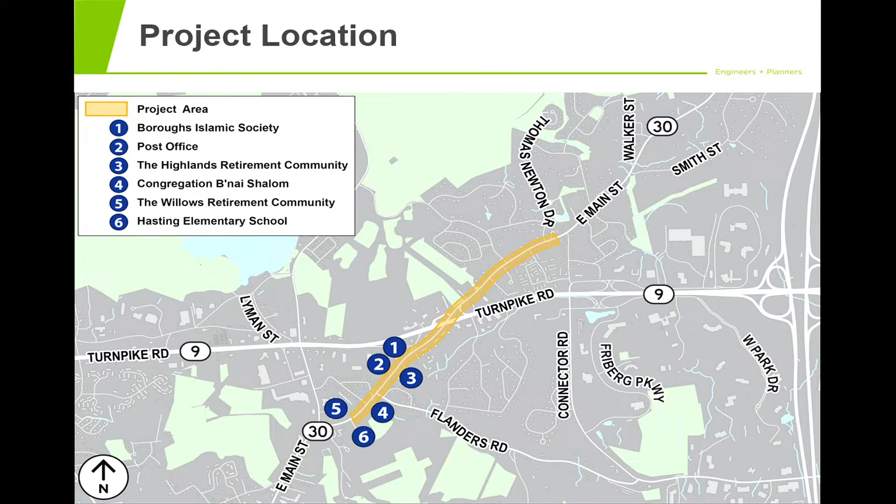So the next few slides have a lot of words. The point here is just that the effort to do this project is documented in guidance the town has produced. Maybe some of you were part of those documents.

The master plan highlights an intent to expand pedestrian and bike access for residents, along with addressing some traffic concerns. If you're familiar with East Main Street and Flanders Road, that intersection gets pretty challenging at times. There's been discussion for 20 years about how to address that, and this project is intended to hopefully address that issue.

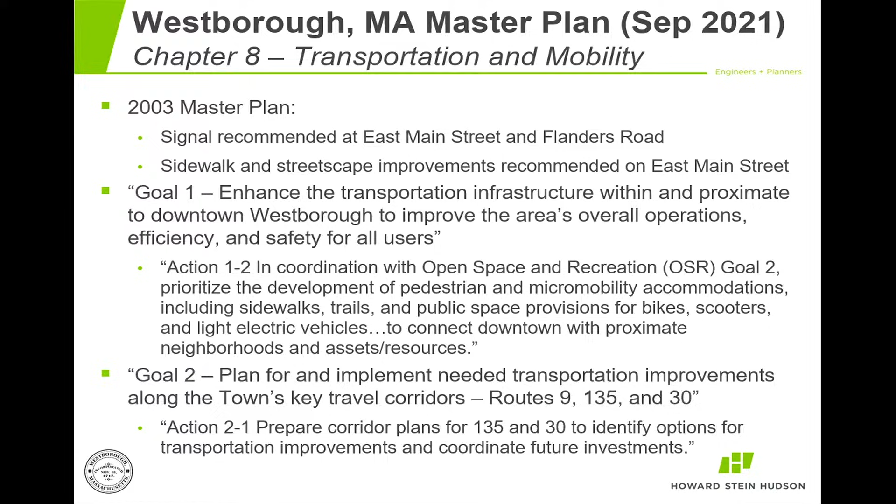We also have a complete streets policy, and we're part of the state's Complete Streets program, which offers funding for projects that improve mobility by bike or pedestrian. There are some components on that list that would be addressed as part of this project too.

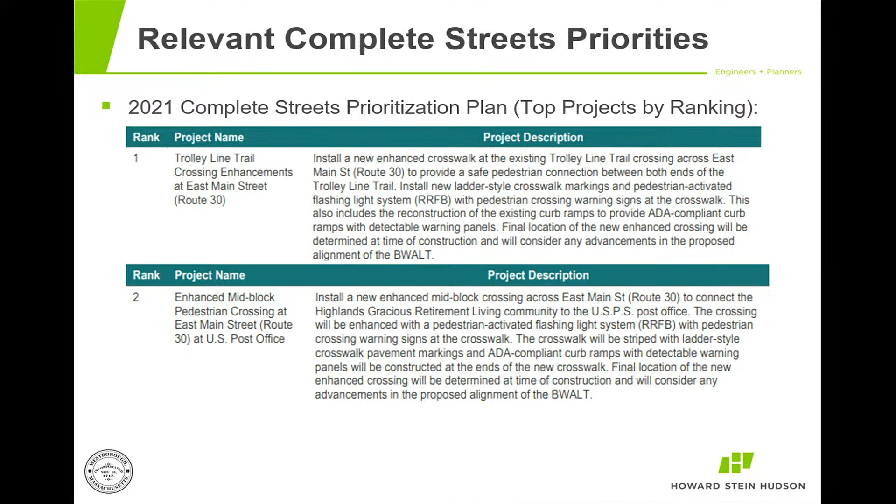So our goals - I've pretty much set them. We want to extend access to the community between the downtown and the outer limits by bike and pedestrian means of travel. The gist of this project is an 8-foot path that would extend from basically Hastings School, head towards the Flanders East Main Street intersection, resolve that with potentially a traffic signal, keep going, go under the Route 9 overpass, and all the way out to Thomas Newton Drive.

8 feet, I mentioned that because going back to the Mass DOT requirements, the requirement is actually 10 feet, and that's what their funding directs. We intend, and we've already discussed, going back to them to get a waiver based on certain circumstances to get that reduced to 8 feet. But we're already starting at 10, trying to get it to 8.

All of these things will come up, but I can see it in people's eyes, you just want to know what's going on - and so why don't we do other things?

Well, there's other options we have. You can put in a sidewalk - Mass DOT is not going to pay for that. So if we want a sidewalk as a town, that's an option we can pursue, but it's going to be a 5-foot wide sidewalk and the town's paying for it in some form or fashion. I mentioned this project's in the $8 to $9 million range, so a 5-foot sidewalk probably isn't 8 to 9 million, but it's going to be several million to get to the same location.

Other alternatives Mass DOT offers, if you don't do a 10-foot wide shared use path, are sidewalks on both sides of the street with bike lanes somewhere in between. It's kind of an alternative way to get away from the shared use path if that's not an option. In this case, looking at the corridor and the conditions that exist, it didn't seem to make sense to put two sidewalks, one on each side, plus bike lanes, because this shared use path, as many of you are probably anticipating, will have some sort of impact on that corridor. But two 5-foot sidewalks and bike lanes would, in our view, have more of an impact. So we discussed with Mass DOT the option of the 10-foot and the potential for the 8-foot path.

So that's what all those words say basically, in terms of our goals.

What I'm going to do now is hand it off to Howard Stein Hudson. They're going to walk through what's out there now. Many of you are familiar with that, but we're going to highlight what's there, and then we're going to talk about what we're proposing would go as part of this project.

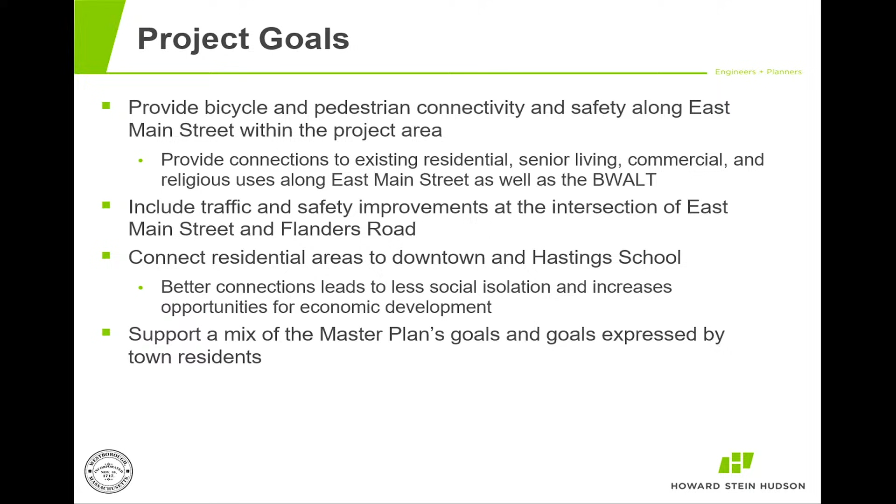Thank you, Chris. My name is also Chris - Chris Lyman. I'm the project manager and lead civil engineer from Howard Stein Hudson for this project. My contact information will be at the end of this presentation, but you guys will probably be seeing a lot of me over the next couple of years being the lead on this project. If you guys ever have any concerns or questions, my contact will be at the end of the slide, so don't be afraid to email me or contact me.

I'm just going to walk us through - Chris already hit on how this project was initiated with Mass DOT and how we got the funding for this project. Back in November 2022, we helped the town put together a rough estimate and cost. We presented that to the Mass DOT Project Review Committee. They liked the project, but they came back with some comments, mostly regarding the cost. The original project was closer to about $12.5 million.

It would have extended all the way to Walker Street, roughly an extra half mile longer than the current project. Mass DOT said they like the project, it's just the funding source. Each district only gets a certain amount of funding per project year, and $12.5 million would have been a good chunk of this district's money for that specific year. They try to spread funding across a couple of communities each year for each Mass DOT district, so they asked us to find a way to lower the cost a little. That's why the project now goes from Hastings Elementary School to Thomas Newton Drive.

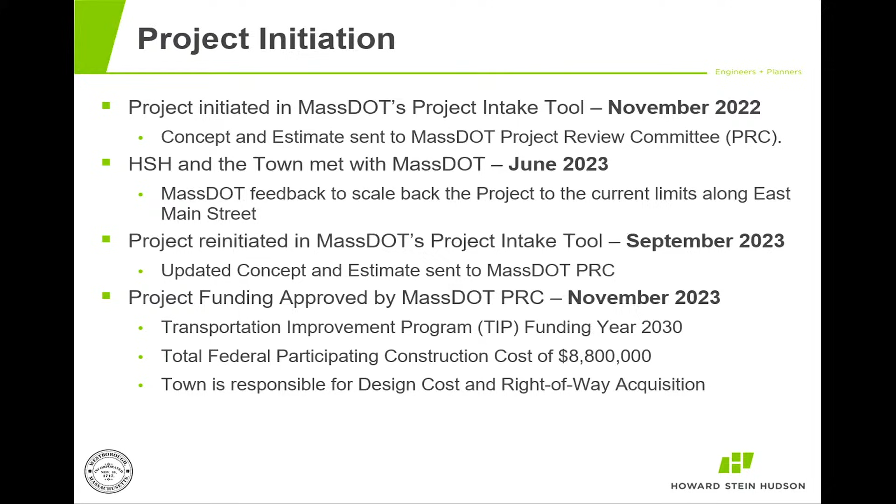After the project was initiated, we started the design process. In November 2023 we got our PRC funding, and in May 2024 we started collecting existing data, including traffic collection data which we reviewed. We then started putting together a scope for the project, which is something we hand over to Mass DOT.

This is our plan and our intentions for the project. Based on our traffic data, these are the potential safety countermeasures we're considering, things like high visibility crosswalks and curb bump outs. Basically we're telling Mass DOT these are the appropriate measures for this corridor.

We got through the scoping process and then moved to the intersection control evaluation. This is only for intersections, not the whole corridor, and specifically for the Flanders Road and East Main Street intersection. You go through a stage where you come up with multiple concepts, whether it's a stop sign controlled location, a signal, or a roundabout. We look at all those options.

We weigh them based on cost and effectiveness to safety, checking if they increase safety at a reasonable cost, since safety is the most important thing. We also look at potential environmental impacts and right-of-way impacts, making sure we're not taking people's land unnecessarily if it doesn't improve safety compared to a more conservative measure.

Going through that process, we determined a signal would be the best option at Flanders Road and East Main Street. That's because the size of the roundabout needed there to allow trucks to pass through would be quite large, with a big impact on nearby residents. This location also didn't have many severe crashes, so the increase of T-bone or head-on crashes wasn't a concern, making a signalized intersection the more appropriate control option.

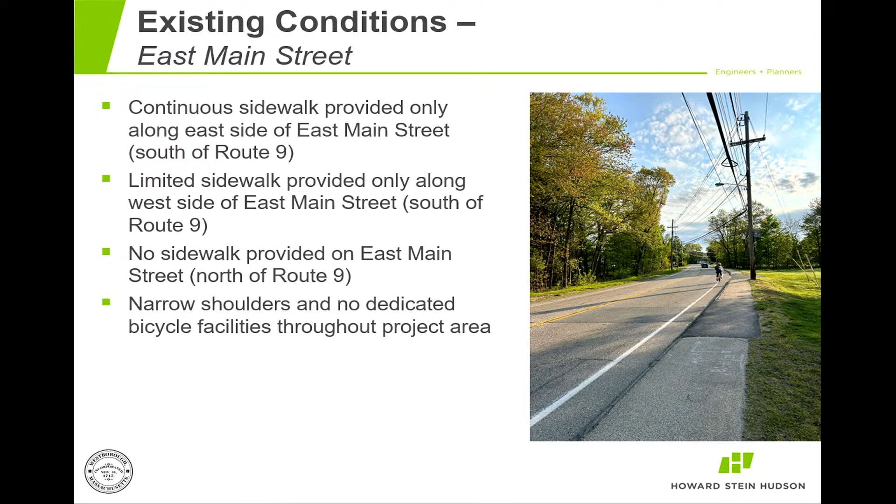Along the corridor for the existing sidewalks, there's a lack of American with Disabilities Act compliant pedestrian curb ramps and sidewalks, which you can see in the picture — there's no marked crossing and no detectable warning panels for when a pedestrian were to enter the roadway, which is required to be compliant with the ADA Act.

There's also a lack of crossings along East Main Street, including no crossing provided for the Boston-Worcester Air Line Trail, though there is an existing crossing approximately 125 feet to the north. The existing crossings generally lack safety measures such as painted crosswalks or curb extensions.

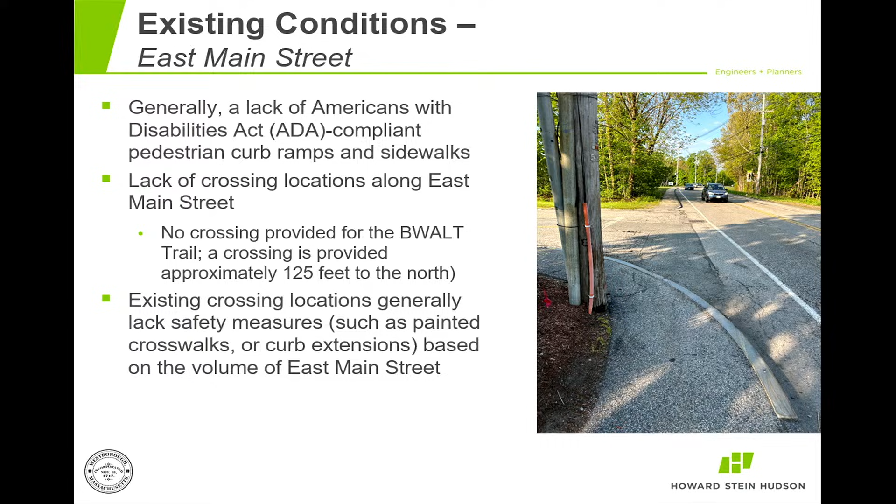Looking at the Flanders Road intersection with East Main Street, there's a lack of gaps for left-turning vehicles coming from both Flanders Road and East Main Street. The left photo shows the queue on East Main Street, and the right photo shows the queue from Flanders Road.

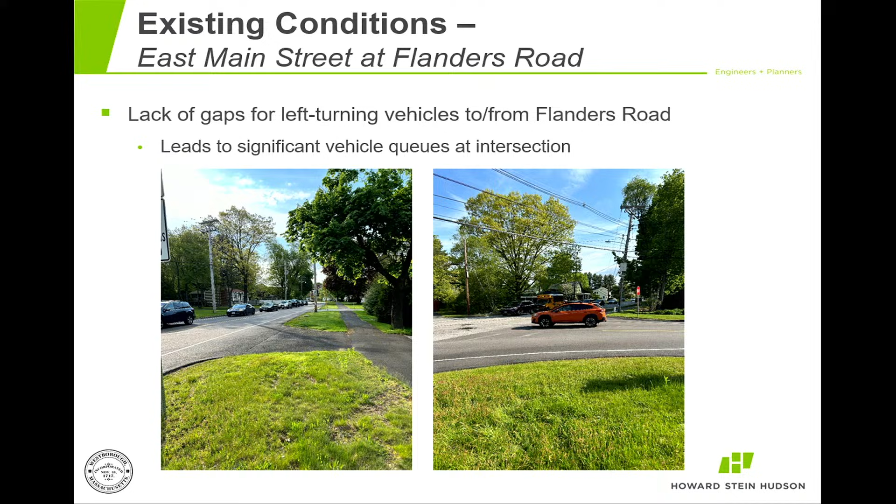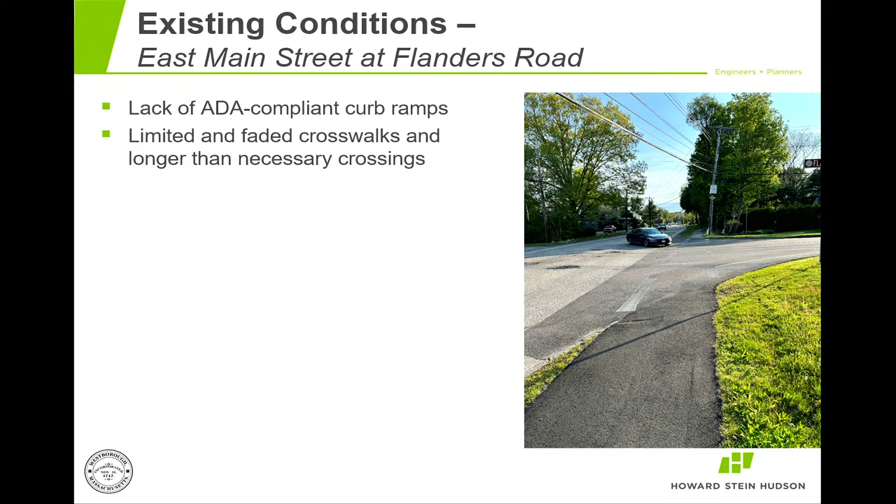As well, for the crossing itself for pedestrians at Flanders Road, the crosswalk is faded and there are no detectable warning panels for people crossing the street. It's generally an unsafe crossing for pedestrians trying to get across this already very busy intersection.

And I'm going to hand it over to Angela to talk about the proposed improvements.

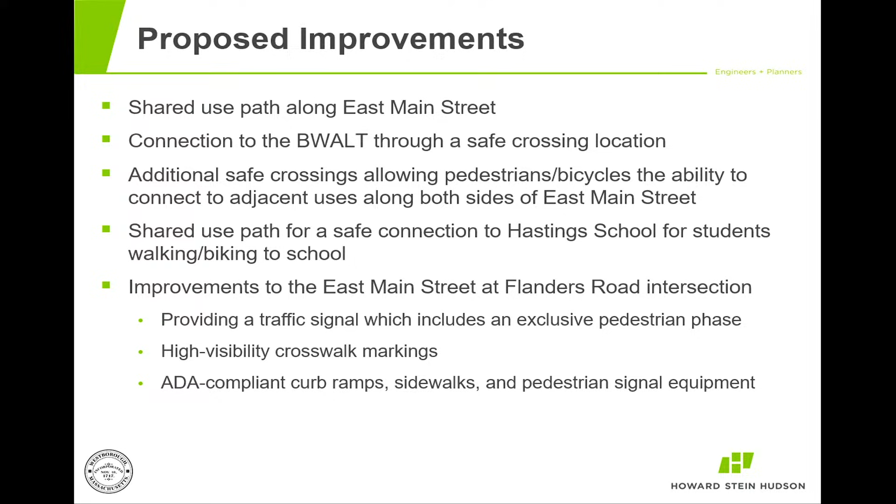So a little bit about the crossing locations we're going to be providing: there will be four. One will be at the trolley line trail, and another at the U.S. Postal Service's more northern driveway crossing, a bit to the north, maybe about 300 feet.

There will be one at the McDonald's driveway, providing a crossing for the trail to go from the east side of the road to the west side on East Main Street, and one at Windsor Ridge Drive, as that's a known desire line for pedestrians and bicyclists at this time.

And a little bit about how we evaluate these uncontrolled crossing locations: we look at the FHWA's STEP program, which allows us to evaluate safe crossing measures based on roadway geometry, volumes on East Main Street, and posted speed limits, providing us with possible countermeasures for these crossing locations to improve safety.

Some of the crossing measures we'd provide include high visibility crosswalk markings, adequate nighttime lighting for visibility, and crosswalk warning signs including advanced crossing warning signs. All of these locations also warrant an RRFB for added visibility of pedestrians.

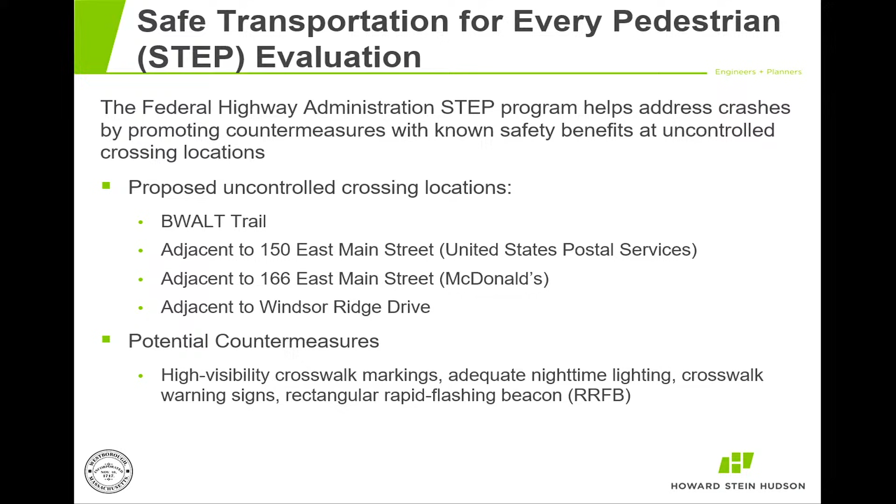Okay, so now the reason why everybody came here, what is the design itself? In the next couple slides, I'm going to go through what the design of this project is, how it's laid out, and what the cross-section of the project is.

I'm going to start off down at Hastings Elementary School, where the shared use path begins. The path will start on the southern side of East Main Street, right before the driveway for Hastings Elementary School. There'll be a ramp roughly in this location, where bikes currently in the roadway will be able to ramp up onto the shared use path and gain access to a safe shared use path.

It'll continue on the south side, go down, and then continue to Flanders Road. At Flanders Road, it'll cross Flanders Road. We also have crossings across East Main Street here at Flanders Road, because this is a protected intersection now with the proposed signal, which will be the safest way to cross pedestrians from one side to the other. So anybody coming from Hastings Elementary School who needs to get to the other side, either to Shepherd Road or any of the locations along here, can now cross at Flanders Road.

We're adding a sidewalk on this side to allow for connections not only to the post office, but to allow for better crossing of some of these side streets that run along here, because I know there have been times where people cross here to try to get to those side streets across the street.

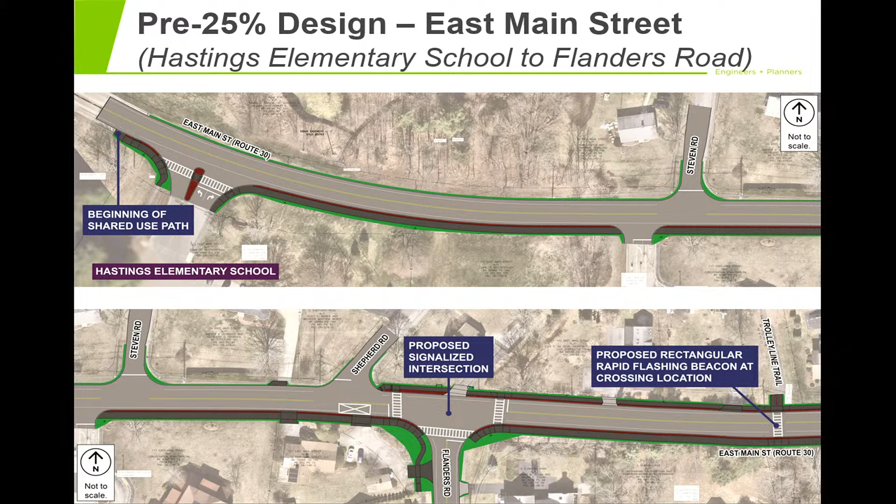As I go along, I'm going to pull up a cross section of what it would generally look like in this section. Here's what it would generally look like: you have 4-foot shoulders, 11-foot travel lanes.

We're also proposing to repave East Main Street along this corridor, so we can update the pavement markings to make for more appropriate shoulders and lanes. I want to point out, as Chris talked about, we tried our best to narrow the roadway to help control speeds in the area, but also to make sure we're not impacting private property as we put in this path. The first part of that was making sure this was an 8-foot shared use path.

We're trying to get a waiver with MassDOT. During the pre-25% process, there was verbal approval that they'd be okay with that. At 25% design, we actually get approval from MassDOT that an 8-foot shared use path is okay. Right now we're proposing an 8-foot shared use path.

The other thing we did, like I said, is move curb lines in. You can kind of see here, we're moving some of the curb lines in, again to make more room for that path, so we're impacting private property to the least extent practicable. That was the whole goal of this: to add connectivity, add safety, but not impact private property and the residents who live along here.

So as we're going along, this is the general cross section. You're going to have a 2-foot buffer here. We've been talking with the town about what could be placed there.

There are two options. You could have something more like a landscape, grass buffer there, which may require a little more maintenance either from the town or from the residents who live there, who would have to maintain that little strip of grass in front of their property. At 2 feet, sometimes these landscape portions don't always succeed, meaning that's a section where during winter, with ice, a lot of salt gets put on the road, and when plows plow, a lot of that snow is going to land in that area, especially when they're clearing the path.

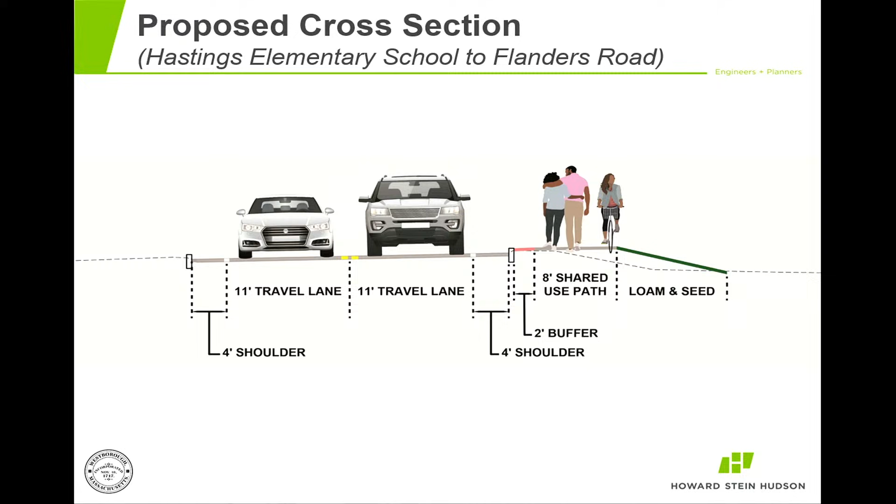As we go down, here's the grass strip I was talking about. This is roughly what your path would look like. You'd have your RRFBs, your curb line, a 2-foot wide buffer zone, and then your shared use path like you see there. Again, this is nice and green right now, but it hasn't gone through a winter yet, and from experience, 2 feet is very small for grass. But if the residents want grass, it's definitely an option. We've put it in here, and we've put it in plenty of places.

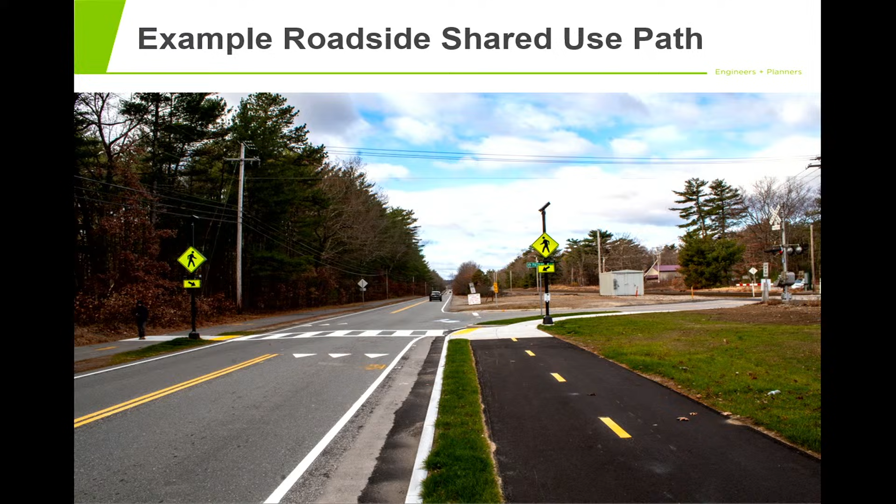Another example from a project we've done that's very similar to yours is how we would ramp up and down from the existing roadway. Here's an example of a way we would ramp down into the roadway to allow pedestrians and bicycles walking in the roadway to ramp up, and again you still have that RRFB location there.

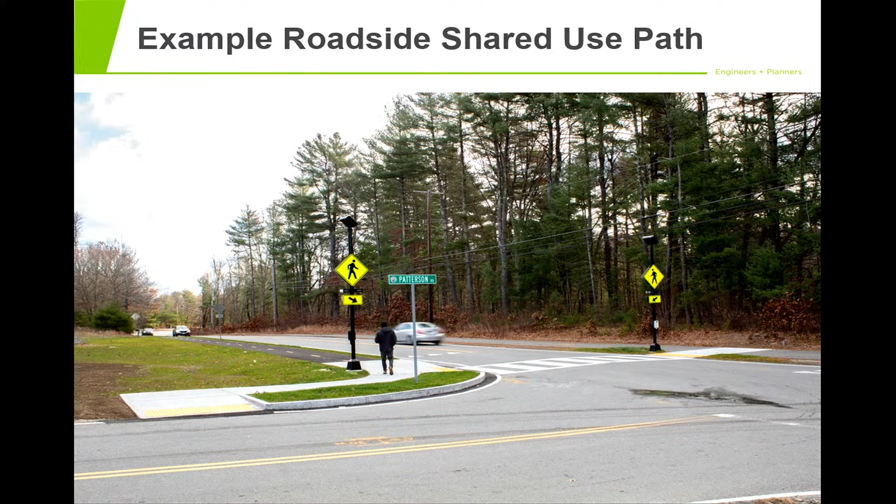As we keep going along from Flanders Road, this will run from Flanders Road to Route 9 eastbound ramps. Past Flanders Road is the mid-block crossing I talked about, and there's also an existing crossing generally in this location that goes to the post office. We've determined to move that for safety reasons, because having 2 crossings too close together can cause problems with people wondering which crossing is active when you press the RRFB, and from a distance it's hard to tell where pedestrians are crossing, the closer one or the farther one. So we like to have distance between these crossings.

So we're actually moving that post office crossing down one spot to the next driveway, so we have some separation. But we still wanted to make sure we gave a crosswalk for anybody in the retirement living facility down here, because I know that was important to the town.

As you get along, we're going to keep the shared use path on the southern side. That's to avoid the whole interchange with the Route 9 ramps. There's also currently a sidewalk here, so there's already a disturbed area there, which is a good spot to put a shared use path.

As we get closer to the Route 9 bridge, a bit farther down, we're crossing over at the McDonald's. There's a couple reasons for that. One, the slope on the south side near that bridge is extremely steep, so it would potentially require a very big retaining wall to keep the path on that side. It also gets very narrow under the bridge, and there's already a sidewalk on the northern side as you cross under, so we're just connecting into that sidewalk and reconstructing it.

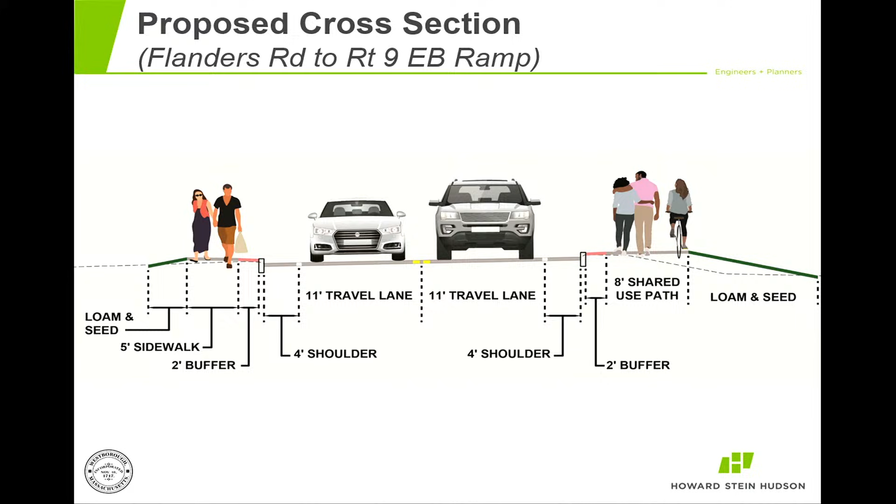A great example of what the general cross section would look like: you have the sidewalk on one side that would basically end roughly at the post office, and you still have your shared use path on this side, with the same lane distribution of 4-foot shoulders and 11-foot wide travel lanes.

As you continue down to the McDonald's at this location, there's that mid-block crossing I was talking about. This is where the shared use path would shift over to the northern side of East Main Street and go along the McDonald's parking lot. There's a potential for a small retaining wall, a very small modular retaining wall, not a massive one, and that's just to make sure we don't impact the area.

There's an existing retaining wall farther up on that slope. We want to make sure we're not impacting the existing retaining wall to McDonald's, so it'd be a very small retaining wall here. An example of what that would look like is roughly a 3 or 4 foot tall retaining wall versus a 10 to 12 foot high retaining wall.

You can see here it starts getting narrow in the roadway as we come along, narrowing down as we get closer to the bridge. At the bridge, this is where that narrowing happens as we cross under Route 9. So this will narrow down to a 6-foot wide path in this location. The reason is we didn't want to impact the foundation of the bridge itself, and we wanted to make sure we'd be able to fit underneath and still keep a safe distance, because it gets very tight underneath there.

A cross section of roughly how this would look: we'd move down to 2-foot shoulders, 11-foot travel lanes, and a 5.5-foot sidewalk there. Including the curb, you have 6 feet at least.

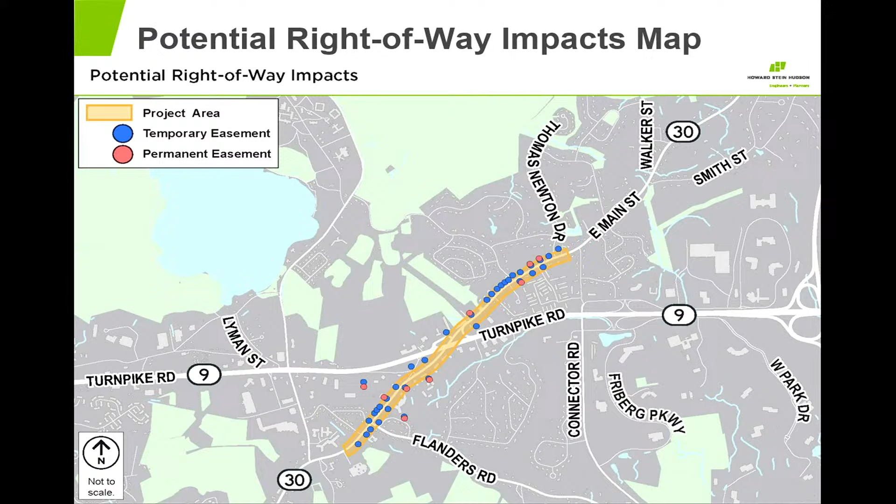There's also a few locations where about 6 inches of the path will be on private property, which is why we require permanent easements there. Anywhere the path is on private property, we'd put in a sidewalk easement as a permanent easement. I have a list, and I think you guys have it too. You'll see we have a lot of temporary easements, but again these are normally for grading and driveway reconstruction, just to make sure your lawns and landscaped areas tie back into the path.

We're not causing very weird grade changes. Same with driveways, we want to make sure we keep your driveways as accessible as they were before, making sure we're not altering them. That's why we need a lot of these for these driveway reconstruction areas. You can see most of these are all for grading.

We also have one for some wall construction. This is closer to the McDonald's parking lot there. That's just to make sure that we can grade behind it and make it safe.

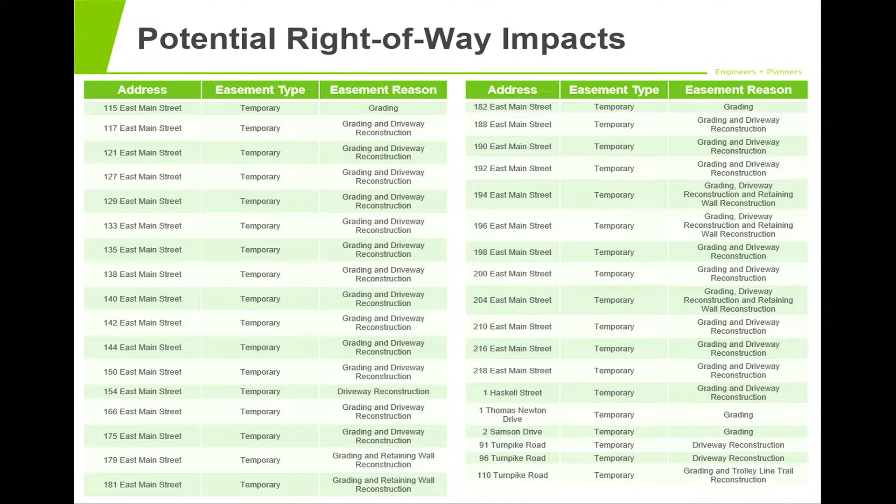And then the ones that people are probably more interested in are, again, like I said, the permanent easements and those alterations I talked about. As you can see, most of them are for utility poles. There's 2 locations farther down the corridor where they're used for the shared use path and the RRFBs. And then you have the 2 alterations I talked about at Flanders Road, that's for the traffic signals at that location.

Again, this is very conceptual, so if there's concerns by any of the residents, please bring them forward. This isn't set in stone, none of this is set in stone. The whole point of this process is to get you guys to voice your opinions and concerns, and we can go back to the drawing board and when we get to 25%, try to incorporate your concerns into that design, and then we would actually come back in front of you guys at a DPH where you can see how we've listened to your concerns and try to address them at another public meeting like this.

So what's next for the project? The next thing would be to move on to 25% design, which we submit to Mass DOT and the town roughly this summer.

After that, we'd go to that design public hearing I was talking about. This gives the public another chance to come back and look at the full design, where we have grading set, we have our easements hopefully set, and we have more idea of the impact numbers that are going to happen to each property.

After that design public hearing, we'd move to 75% design submission. That'd be roughly the next summer. And then in spring of 2028, we go to 100% design.

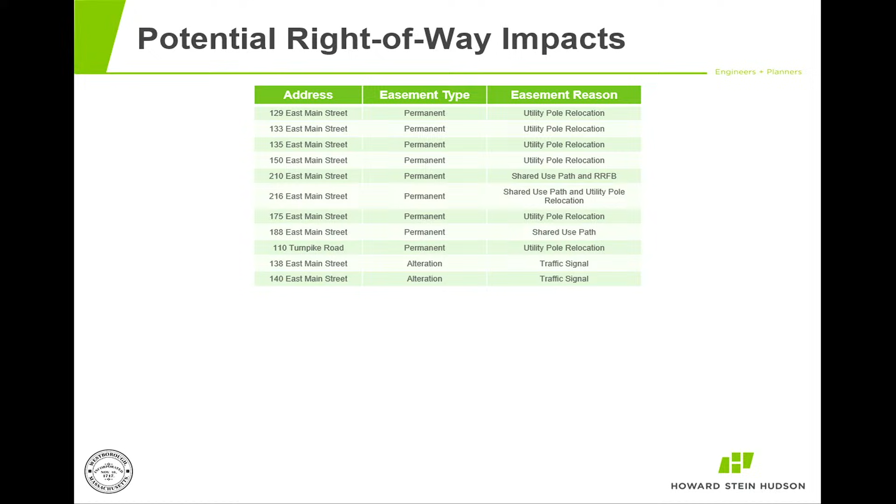So is the road being narrowed? It is being narrowed, yes. It's being narrowed in some areas, not everywhere, but areas where we saw that we could narrow the roadway and not impact private property, we did bring it in. We went through that with Mass DOT to make sure we were trying to get a more consistent cross section through the roadway too, because there were certain areas where you had really big shoulders and then really narrow shoulders. We were trying to make sure that if you're driving down it, you'd have the same lane width the entire way through the corridor, and the same shoulder width the entire way through. Because the wider your shoulder is, potentially the more higher speeds you're going to have. We're trying to have it more consistent, so we're keeping more consistent speeds closer to that speed limit, and also allowing for shorter crossings. So we tried to really bring in the roadway where we could to increase safety, hopefully slow people down, and make a more consistent cross section of the roadway the entire length of East Main Street.

The other thing is, I know that you're going to try to flatten the road at the top of Haskell, but to me, I want to go on record as being concerned about people coming down the street at 50, 60 miles an hour regularly, tons of accidents at that location. Now you're going to put a bike path and a footpath, and the bikes are going to be flying down that road right across that intersection where people are trying to get out. To me, that's a personal safety issue with that location, especially where it's all downhill. Cars are flying, bicycles are going to be flying, people are going to be walking or running, and you've got people trying to pull out of it. I don't know if anyone here has tried to pull out of Haskell - it's like almost impossible. There's accidents all the time. I can't tell you how many times I go out to help people where basically someone pulled out in front of them, or the opposite, because of course everyone wants to blame someone else. I go out there all the time for accidents. I can't imagine adding more safety issues there for that area, and I want to go on record to say that might need to be addressed, how that can be made more safe for that kind of thing.

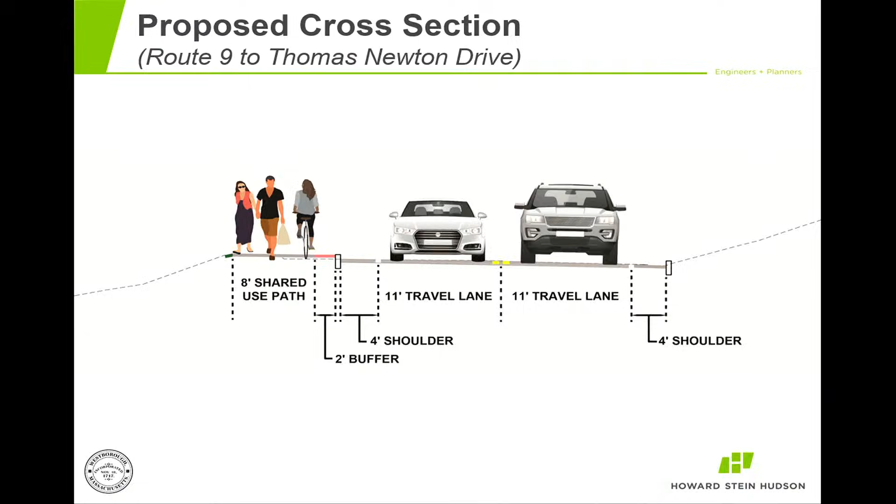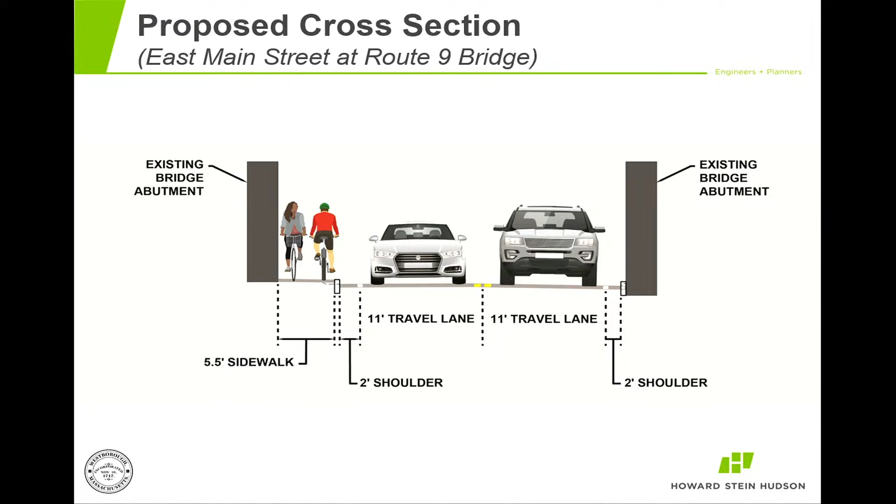All right, thank you. Hey, could you bring up the mid-block crossing at the McDonald's? Yep. Mark Silverberg, 7 Weld Street. Oops, went the wrong way. Should be the next one. Sorry, these lag a little bit because they're bigger files. That's all right, I think it's the next one right here. Come on, there we go. Now I promise you this one - there we go.

Is that crossing far enough from the bridge so that cars heading westbound will have enough time to see the beacons? Yeah, so we did look at that - going down the bridge affects your line of sight, and we do look at stopping sight distance when we place these. That's part of the step evaluation that Angela talked about. We actually moved it - there's a crossing here, and we moved it back because we wanted to make sure we weren't impacting this driveway and this driveway. We wanted it a little farther away from all those turning vehicles. But we did do a stopping sight distance evaluation.

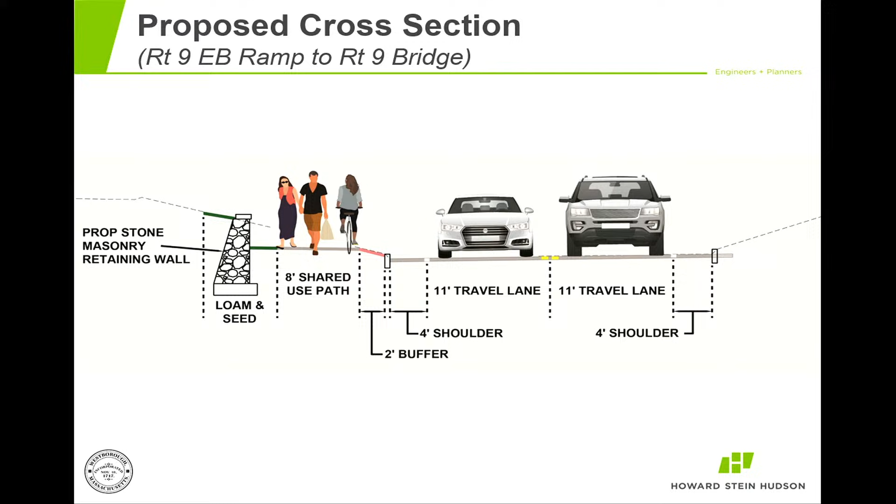Okay, and then could you go to the next cross-section, is it the Windsor side of the bridge? Yep, this one right here. Yeah, that Route 9 westbound on and off ramp, that's a pretty hectic intersection. Will there be any center crossing island or some type of signalization there to help people cross, because you've got a lot of traffic movement going in different directions?

Yes, we looked at one alternative here, putting in a center refuge island. The biggest problem is that a lot of trucks come along Route 9, and the way it turns so quickly over is that a truck coming down this location, in order to not hit a car here, needs to make a big swing this way, and their trailer actually drags. I don't know if any of you have experienced this with trucks, but their trailer is actually going to drag even pretty close to that turning lane already. So if we put a center island there, the truck wouldn't be able to make that turn anymore. And we can't push the roadway farther this way because of how quickly those slopes get to the bridge - there's already a guardrail running right along here because of how steep the grade is going down there.

I know there were talks about putting a signal here. They didn't see it as needing a signal when we talked to MassDOT from the beginning - Flanders Road was the only location they saw as potentially needing signal control. What about rapid flashing beacons? Those wouldn't really be effective here because they potentially would be facing the wrong direction, so you couldn't see them. We do know it's an extremely long crossing. We're going to keep looking into ways we can add a refuge, because it is extremely long. I agree with you - trying to somehow put a refuge or something there. It's definitely on our radar.

From that design, especially as you get farther up this section to the northeast side of the project, it's only a few inches from the proposed back of the path to the property. There's not a lot of room there. As you get more to the southern side, there's a little bit more room in that section, that's why there's less impact toward the southwest side of the project. But as you get to the northeast, there's not tons of room to do work within the town right of way.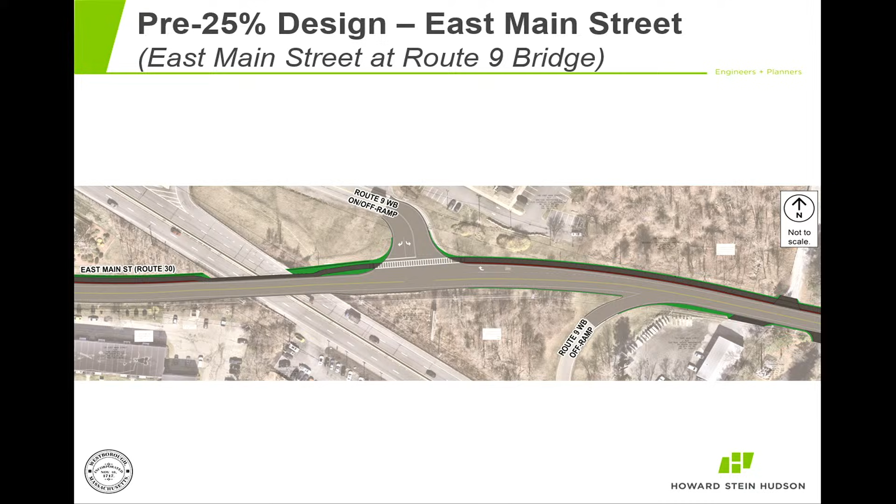I'm sorry, I have a follow-up question that I forgot to ask, but this is reminding me of it. With the 4-foot shoulder, is that going to be consistently 4 feet throughout the whole corridor? It'll be consistent except at the bridge.

Oh, well, yeah, we discussed the bridge, because the way striping's been done in this town, the travel lane for motor vehicles is standard, but then you're kind of forced into the curb or the road. But I thought that was the answer, and I'm happy that's the answer. Yeah, anywhere, to be honest, where I could make it more consistent cross-section, we did.

That's why we're doing a lot of paving, because we're also doing a lot of curb work to bring it in certain areas to make it more consistent. That's what I thought. Thank you.

And that striping that you're referring to in other locations is not because we can't measure from the center to the outside of the road, but because the width of the road varies on many of our roads. So we want the width of the lane to be consistent, and we measure from the center to the outside. If it's got a white line, a fog line on it, then it's measured to 10 feet or whatever the distance is. So there are sections on many roads where, beyond the white line, it's varied width.

Right, and as you say, that's just striping. You're rebuilding here, so you can make it consistent at 4 feet. Yeah, if you're talking about not painting hardscape, we're trying to make the width of the roadway a little more consistent the entire way.

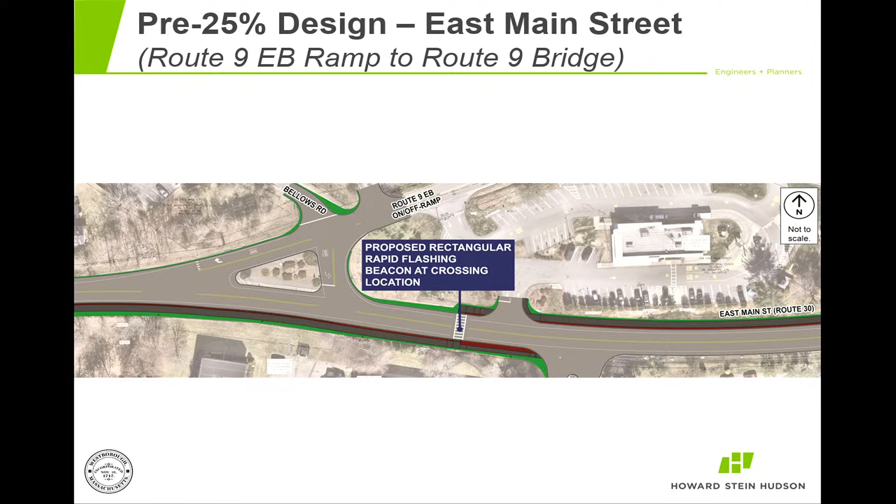Yeah, which again would be, I think, a big safety issue, because they really queue up, people get frustrated, and cars are going up on the curb. So that's number one.

Number two was the bridge. This is really, I think, the stoppage, that people don't feel safe right now. It's always precarious when you see folks walking under the bridge. There's a desire path there, right, so it is happening. So this is great to hear that you've got some progress on that.

A couple things I would throw out there to recommend is lighting. Potentially paint that side white, because it's dark, it's loud, the traffic over you is going 60 miles an hour. It psychologically doesn't feel safe, right? What you're going to do is going to make a big difference.

What's great about the bridge down here by Dunkin' Donuts is the sidewalk is elevated. So cars are going to come in, it's going to be darker. If there's any way to even just 10, 12, 14 inches, so you have that real barrier—physical, but psychological—it doesn't feel unsafe walking under the bridge, going from Dunkin' Donuts towards the road.

But this guy here, if there was a way—I know cost is a big part—but just to have it a little higher, just the side, just the side.

And the last thing I'll ask is, it appears that money had you stop short. Olman's is going to be a destination, right? So you're spitting distance, you're almost there. So what happens for the kids who leave Hastings or whatever and head up, and they're 85 yards away or so? So are we envisioning there?

No, I don't think there are any sidewalks that continue on. Yeah, 'cause when I originally worked with the town on this, we did have it. It was nice that we're hitting all these important parts for the town along East Main Street. Again, like the town said, this is just potentially phase one. We can go back to Mass DOT after this project is initiated and done and say we ended here, we have more desire to go further. And that's always something you can submit to Mass DOT. We can go through the same process here.

As of right now, what's happening is we're connecting the shared use path into the existing sidewalk that goes to Thomas Newton Drive. After that, if you're coming down, we're putting you back into the roadway, because there's no sidewalk down there. Same thing along here, if you're walking along this side of the roadway, there's a ramp up so you can at least get onto a sidewalk and either go to Windsor Ridge or come to this crossing. So past the project limits, you're probably going to do what you're doing now and unfortunately walk the shoulder for right now. But again, the town can always reapproach Mass DOT and find different grant processes to help extend this farther.

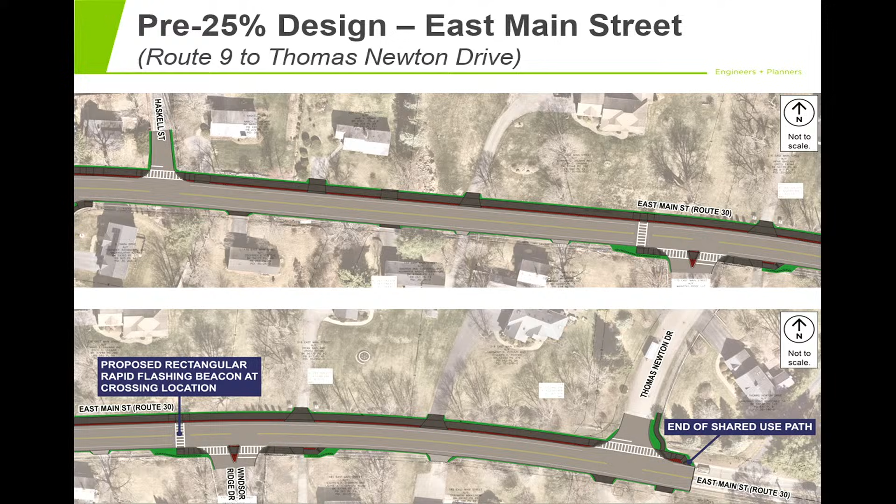Well, when you go have that meeting with them, bring a couple pints of Chunky Monkey and maybe you can. It's one of my favorite ice creams.

Yep, go ahead. Oh, okay, thank you. David Baumgart, 225 East Main Street, friends with you all. Also applaud you doing this and also applaud getting out in front of it in the town and taking the input from the town. Very important for people to embrace it and voice their concerns. Also for the connectivity. Also wish and hoping for Part B and Part C of this to expand it. One question I have, and this is more of a risk analysis on your end.

How much experience do you have with getting this waiver from going from 10 feet to 8 feet? And does that pose a risk to the entire project, or do you feel fairly confident that the waiver will get accepted? Based on our talks with Mass DOT, they've been very involved with it.

They are very okay with going to 8. We talked about it at the pre-25, the shoulder was brought up. We do something called the Design Justification Workbook, DJW. It's basically a way for me, as an engineer, to say to Mass DOT this is why I'm making the changes I'm making, and I have to base them in fact and data we collected. We put in there that we wanted to do 8. We started off with the town, honestly pushing to say let's just try for the 8 and see what they say. And they didn't have many comments saying don't do this.

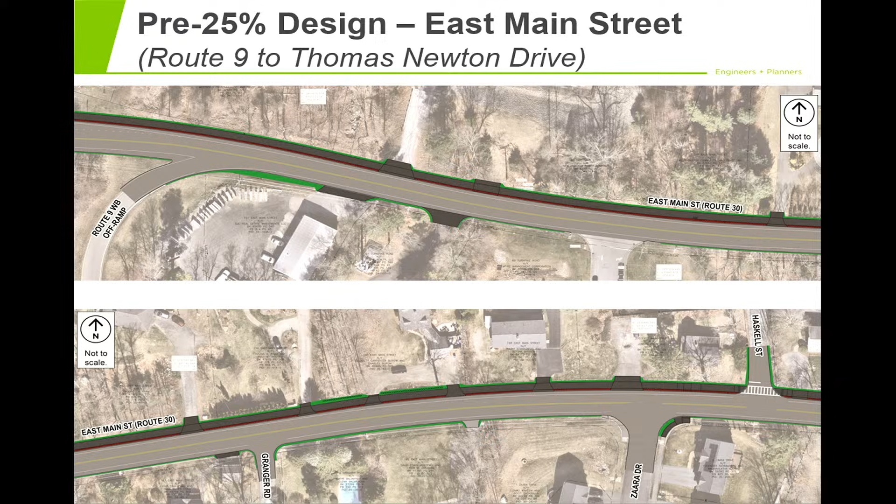I have a second question, about Flanders Road and the signal there. My concern, as somebody who has to drive that way all the time, is that there could be increased major delays in that corridor, which already suffers from major delays. So how are you going to mitigate that?

But when you get what - no, do you have that data with you at all? Because it already gets backed up way back. I don't know if you've ever seen traffic there, but try going down there between 4 and 6.

So you're concerned about how it's going to impact the delays on Flanders and if it's going to make it worse? Sorry, I didn't hear what you said - East Main? Oh, on East Main. So you're concerned about the backups that already exist through that intersection, or when someone's trying to take a left turn? I'm just concerned about the traffic jam that already exists on East Main.

The signal was determined more for safety, to allow people on Flanders to get out. It would stop people, we haven't done a full evaluation of the operations on East Main yet, but it would stop people for maybe 20-30 seconds at most. So it would back up momentarily, but it would dissipate once Flanders Road had a red light again. The idea is to get people from Flanders Road out, since we know that's a significant backup. Yeah, and it's a safety concern too. So it's more so for safety that it's being evaluated.

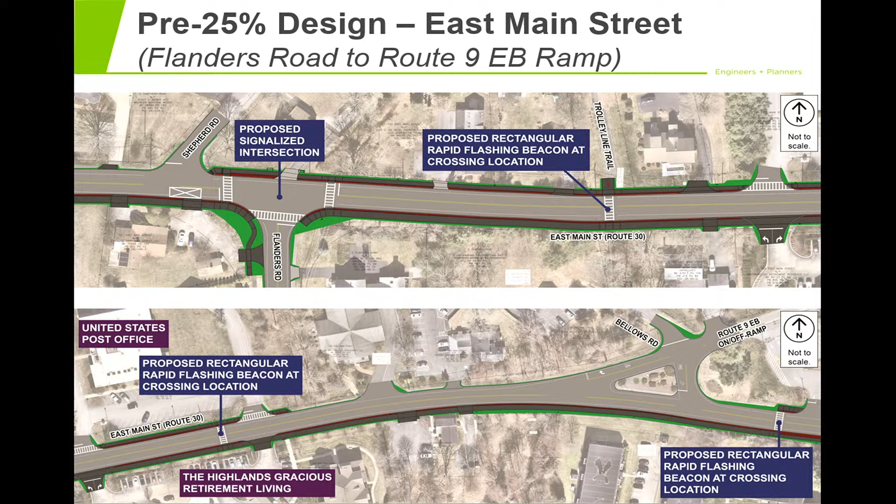To me it's shocking that there are more accidents at Haskell than at Flanders, but Flanders is really tough to get out of. There's a high volume that comes out of there during those peak hours. I saw it coming here, it happens throughout the 4 to 6 hour period.

We're hoping that the signal helps, because I know at least some of the backup that happens on East Main Street, from what I saw, is because cars can't make that left turn. We're hoping that light gives them the delay to let some of these cars make their left turns, which would allow through traffic to come through clear.

What happens is the signal alignment on East Main is where it just log jams. It backs up all the way to the center of town, and then it backs up all the way back the other way. Flanders has some impact, but it's mostly East Main Street.

Yeah, and the volumes are high on East Main Street, like 16,000 vehicles a day, so it is very high. That's part of the reason it's tough to get out of Flanders. If you live over in the Haskell area, you just don't travel that way. I have to go all the way back down Lyman Street and around out to Mill Street to get to the center of town, otherwise I'll be in traffic for a half hour just trying to get five minutes down the road.

I'm concerned that's going to get worse with lights and fixtures. Yeah, and like Andrew said, we will look at operations of intersections adjacent. That's the whole point of this evaluation, we look at intersections adjacent to the project, because what we don't want happening is it backing up the entire way. We don't want to cause safety concerns where you're gridlocked on Flanders Road. So we always evaluate intersections close to our project location to make sure everything's working efficiently.